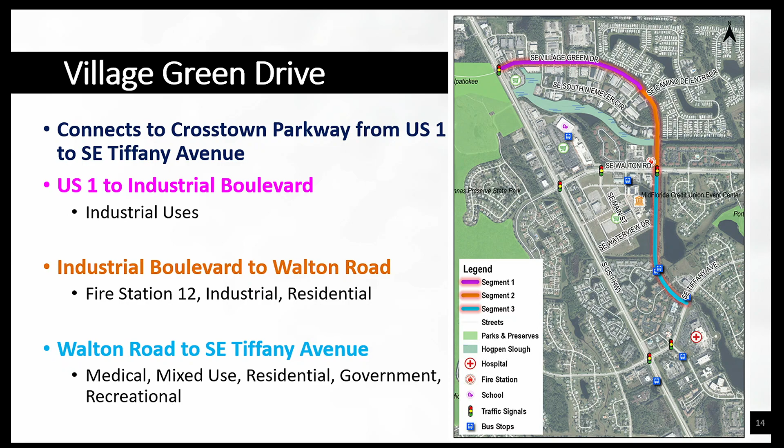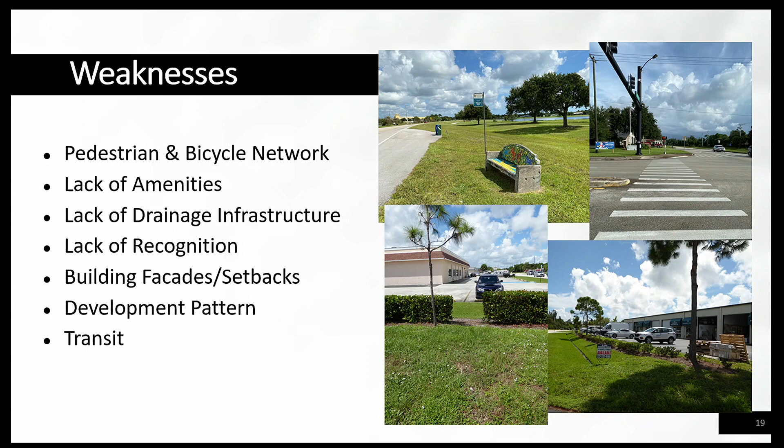Some of the weaknesses along the corridor: we found missing bicycle and pedestrian facilities, the development pattern, which is very autocentric in nature, building facades and setbacks, and also the existing transit on the corridor.

The posted speed limit here is 30 miles an hour, and we found through our data collection effort that the average speed is about 40. At 40 miles an hour, if a pedestrian were to be struck, there's a 90% chance that they would be killed. And of course, this number and the chance begins to decline as the speed declines.

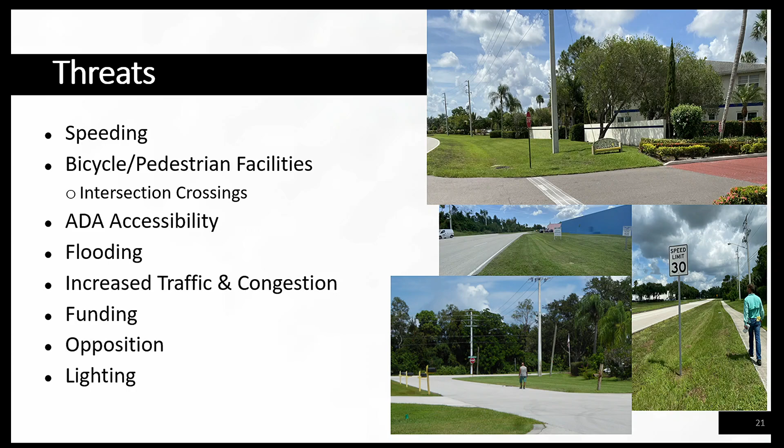Additional threats include ADA access, which are items like curb ramps, crossings, detectable warning pads, push buttons to cross, those type of items. Next slide, please.

So next, we're going to be talking about the existing conditions. Just a reminder, we went into more detail on these items at our first meeting. So this table illustrates the raw data we collected over a 72-hour period, which is the daily traffic along Village Green Drive and the speed.

The first 3 rows are between US 1 and Walton Road, and the last 2 rows fall between Walton Road and Southeast Tiffany Avenue. As you can see, the first 2 segments have 3 times more traffic than that last segment south of Walton Road.

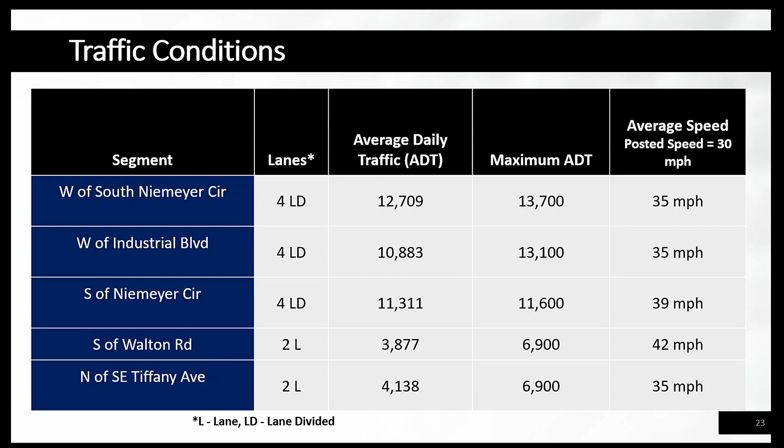As I mentioned previously, the posted speed limit is 30 miles an hour, and you can see the average speeds were from 35 to 42 miles an hour. Again, this is an average, which means that vehicles were traveling above those speeds.

So as I previously mentioned, the roadway was separated into 3 distinct segments due to the roadway configuration and the available right-of-way. So we're going to quickly go over those 3 segments.

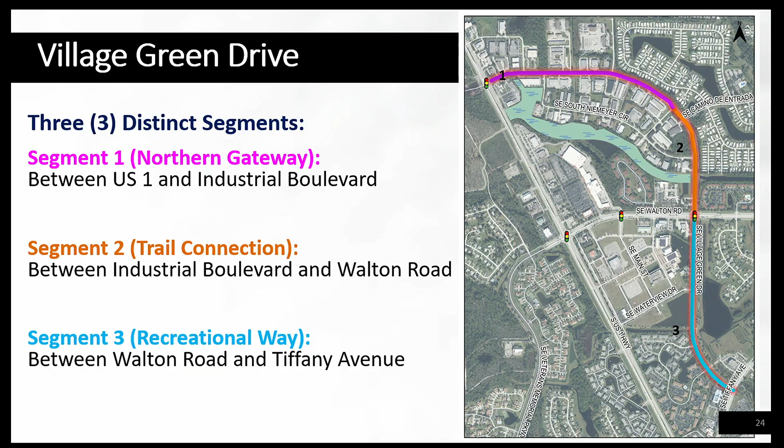Next slide, please. The first segment is what we've dubbed the Northern Gateway, and it connects the Crosstown Parkway. This is the segment which receives the most traffic. Here, the right-of-way is approximately 100 feet in width. Buildings are set back. You have primarily industrial uses.

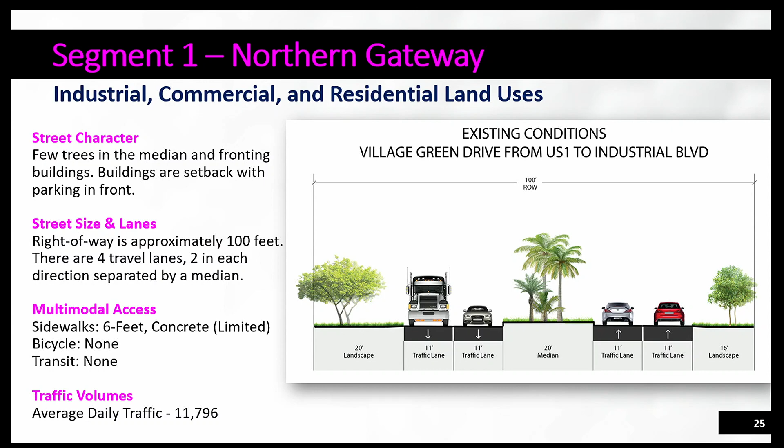There's no pedestrian access from the buildings to the roadways. There's 4 lanes of travel separated by a 20-foot median with 16 to 20 feet of landscaping on both sides. There's no transit, bicycle facilities, and no sidewalks with the exception of a small sidewalk near US 1. Landscaping along this section is limited.

Next slide, please. The second segment, which we've dubbed the trail connection, is where the right-of-way opens up to about 150 feet. The buildings here are also set back with parking in the front.

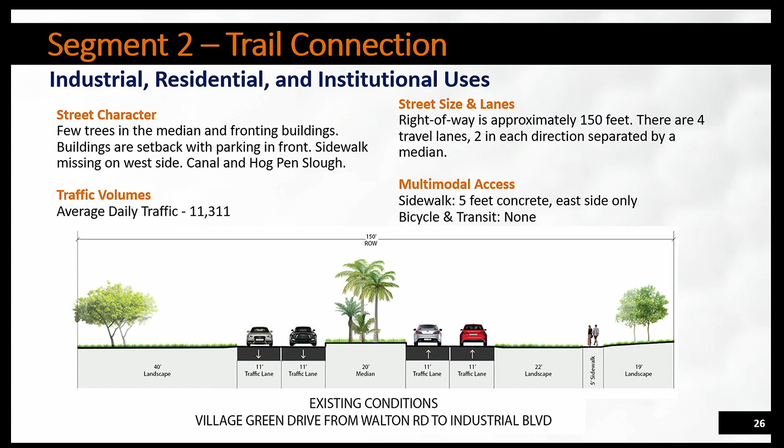Same roadway configuration as the previous segment, but there is about 40 feet of landscaping available on both sides. This segment also includes the entrance to the Spanish Lakes Golf Village community, and there's a canal which connects to the Hog Pen Slough, which we'll discuss later. Again, there's no bicycle or transit facilities, and there's no sidewalks along most of this segment with the exception of a 5-foot concrete sidewalk on the east side, connecting the Spanish Lakes community down to Walton Road.

The third segment, which we've dubbed Recreational Way, falls between Walton Road and Tiffany Avenue. It's a little bit different in character as well as traffic volume than the first two segments. Here's where the travel lanes go from 4 to 2. There's no buildings fronting this roadway. You can access City Center from this segment.

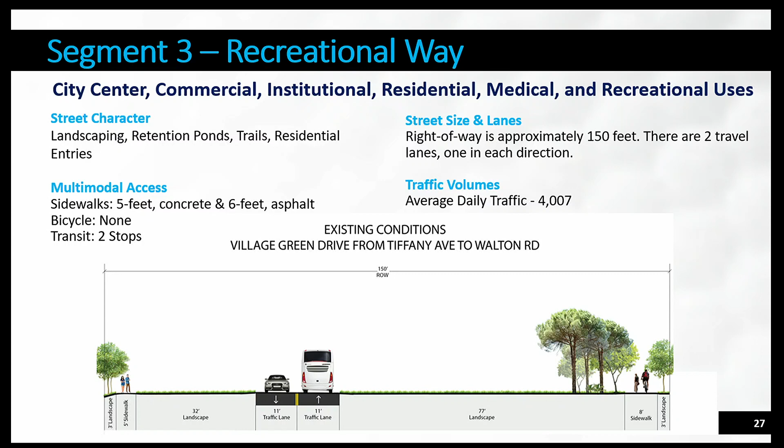The right-of-way here is still consistent with the second segment, being at 150 feet. There's sidewalks on both sides of the roadway with the exception of a missing link between the entrance of the Midpoint condominium community and Tiffany on the west side. Traffic here is significantly less, and you have the Wood Stork Trail on the east side. There's lots of opportunities here for recreational enhancements along this segment.

So we're going to jump into our conceptual designs. We have 2 concepts to present to you tonight. This is going to be for the first segment, which is US 1 to Industrial Boulevard.

The first concept, shown on top, includes a 10-foot shared use path and a 10-foot sidewalk, which can also be used as a shared use path. Essentially you have two wide sidewalks in that first concept. The second concept includes two 6-foot sidewalks on each side, a 5-foot separated bicycle lane, separated by a 3-foot concrete barrier.

Melissa, poll question please. Poll question number 4: select the design concept you prefer for segment 1, US 1 to Industrial Boulevard. Concept 1 is the 10-foot shared use pathway at the top with the 10-foot sidewalk. Concept 2 is the 6-foot sidewalks, the 3-foot concrete buffer, and the 5-foot separated bike lanes. You can go ahead and make your choice.

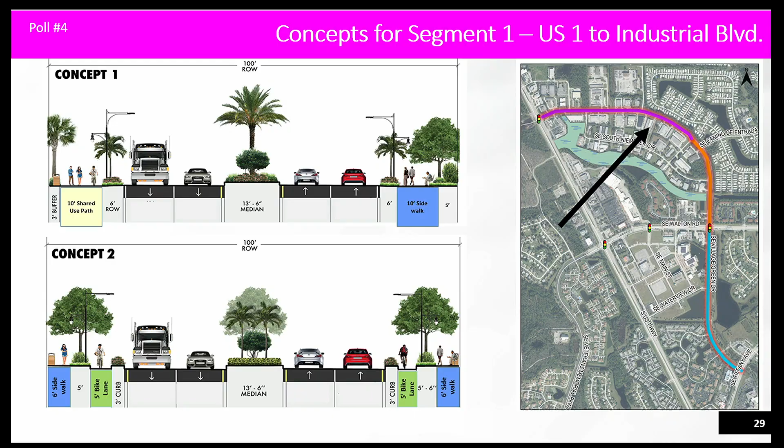All right, moving on to the second segment, which is Industrial Boulevard to Walton Road, and this is where the right-of-way opens up. The first concept includes the shared use path here at 12 feet and a 10-foot sidewalk on the opposite side. Then you have concept 2 at the bottom, which includes two 10-foot sidewalks, a 5-foot separated bike lane, separated with, again, a 3-foot concrete barrier.

Melissa, for your 5th poll: select the design concept you prefer for segment 2, Industrial Boulevard to Walton Road. Concept number 1, a 12-foot shared use pathway and a 10-foot sidewalk. Concept 2, two 10-foot sidewalks, a 3-foot concrete buffer, and a 5-foot separated bike lane. You can go ahead and make your selection.

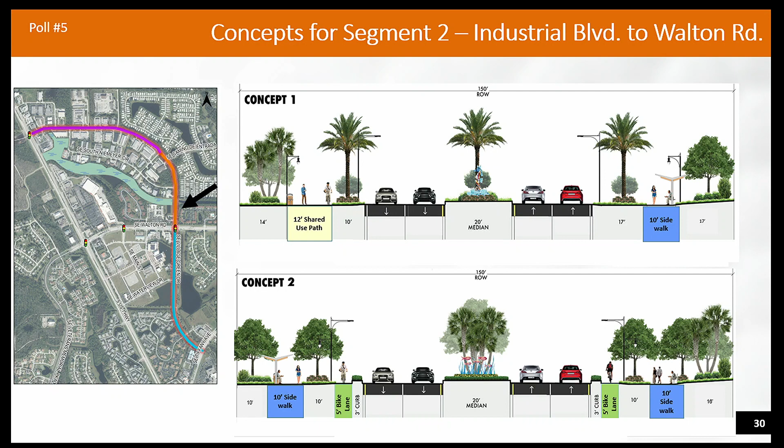We'll go ahead and close that one out right now. Same as last time, 53% concept 2 and 47% concept 1. So pretty much right down the middle. All right, wow, got a tough audience here.

This is our next segment, which is Walton Road down to Tiffany Avenue. Concept 1 includes widening the Wood Stork Trail to 12 feet to become a shared use pathway, a 10-foot sidewalk on the opposite side, and we're proposing a 20-foot center island median to match the first 2 segments. Concept 2 includes relocating the Wood Stork Trail closer to the roadway, 2 5-foot separated bicycle lanes separated by a 3-foot concrete barrier, a 14-foot median, and a 10-foot sidewalk.

Melissa, select the design concept you prefer for segment 3, Walton Road to Tiffany Avenue. Concept 1: 10-foot sidewalk, proposed 20-foot center island median, 12-foot shared use pathway for Wood Stork Trail. Concept 2: 10-foot sidewalk, proposed 14-foot center island median, parallel parking, 3-foot concrete buffer, 5-foot separated bike lane, and 10-foot shared use pathway for the Wood Stork Trail. You can go ahead and make your selection.

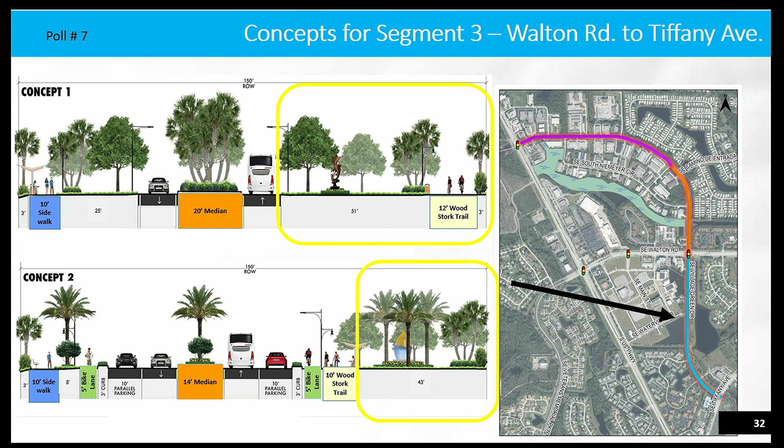Great, we're getting some great feedback here. Next I'm going to be presenting some intersection concepts. So here we have two options for Village Green Drive and Camino de Entrada, which is the entrance to the Spanish Lakes Golf Village community.

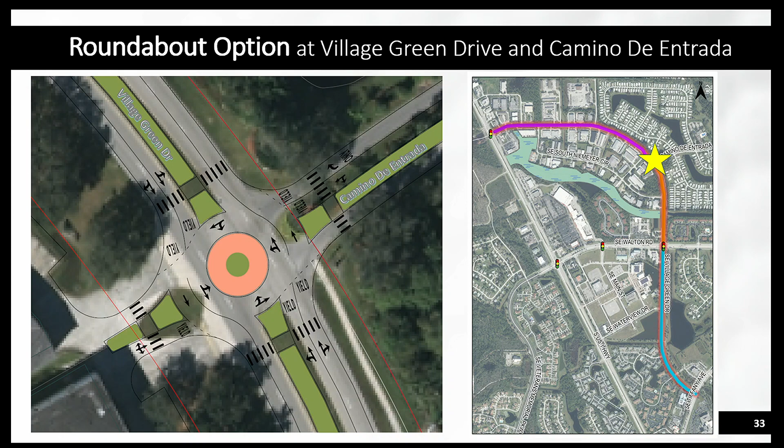Here you see a roundabout option. Roundabouts are a traffic calming technique which slows vehicles down to 15 to 25 miles an hour. It reduces the severity of intersection collisions, improves traffic operations, and makes it safer for vehicles, pedestrians, and bicyclists when designed correctly. We found that a roundabout would fit at this location, and further analysis would be needed if you all vote for this concept.

Next slide. This is the second option at Village Green Drive and Camino de Entrada, which would include enhancements to the intersection, pedestrian crossings with signage, reducing the turn radii, or what we call extended bulb outs, which slows vehicles down when turning, and of course ADA improvements. We're also showing two lanes coming out of the community for right and left turning. We believe this would improve traffic conditions until there's enough traffic to warrant a signal.

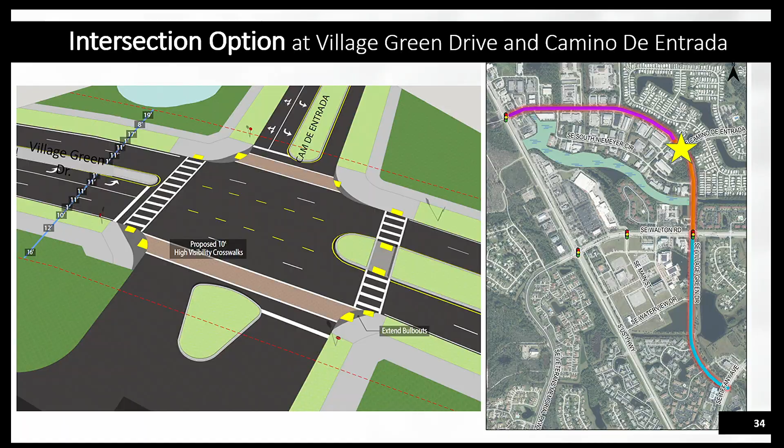Next slide. Here are your two options side by side. Melissa, can you read us polling question number 8, please? Select your preferred intersection improvement at Village Green Drive and Camino de Entrada, a roundabout or intersection.

We can close that poll out. Well, it's 50-50 even, roundabout or intersection.

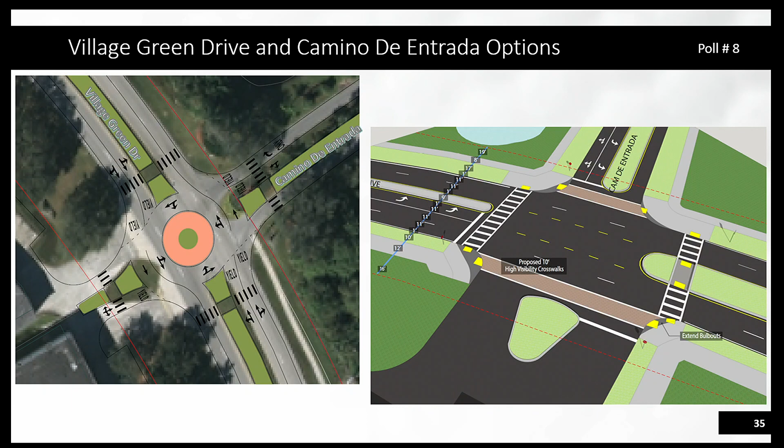So for Walton Road, we'd be looking at intersection improvements, as you see here, which improve crossings. Though we're showing a standard crosswalk, you can apply any type of design or stamped asphalt, and I'll show you another picture in a minute of an artistic style of crosswalk. We're also showing extended bulb outs here, reducing that turning radius, slowing vehicles down when turning, and also shortening the crossing length for pedestrians when they do cross.

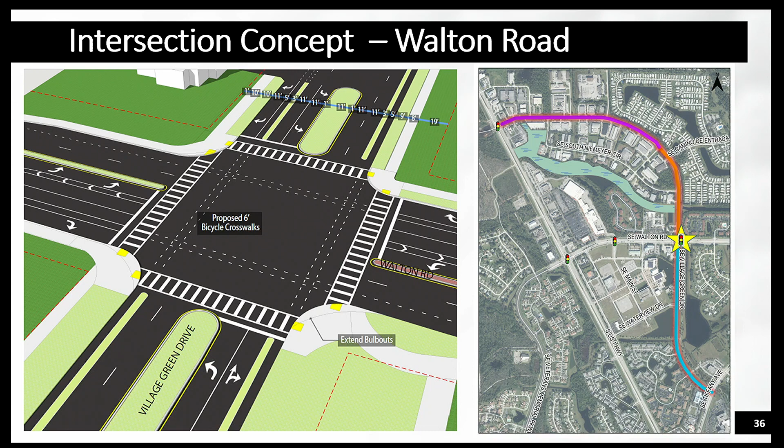Something else we would recommend is for the city to work with the county on traffic signalization, and improvements for not only vehicles but for pedestrians, and maybe looking at putting in a bicycle signal here.

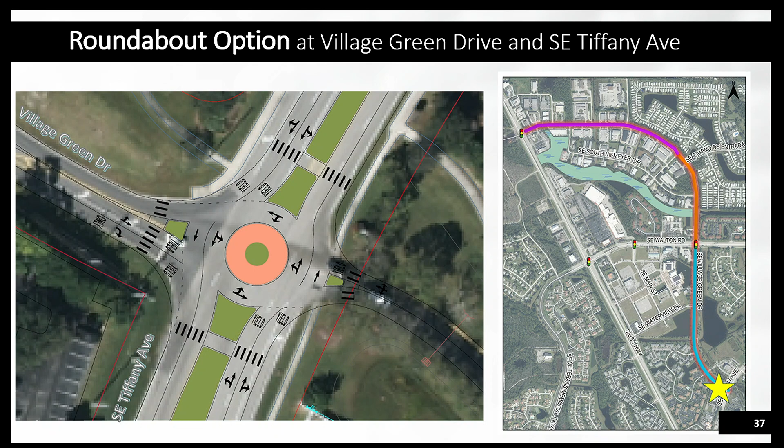Next slide. All right, so we've got two options for you at Village Green Drive and Southeast Tiffany Avenue. This is our roundabout option. Again, we found that a roundabout would fit at this location, but further analysis would be conducted should you all vote for this option.

Next slide. And then here is our intersection improvement option. Again, here we're showing enhanced crosswalks with pedestrian signage, and here we've got a funky artistic design for crosswalks. Again, reducing that turning radius with an extended bulb out, and also bringing a better alignment of the driveway to the medical center.

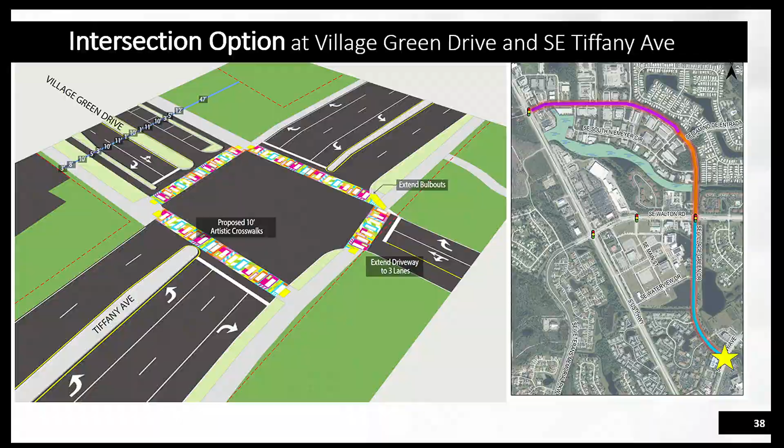Next slide. So here are the two options side by side. Melissa, can you go ahead and read us polling question number 9? Select your preferred intersection improvement at Village Green Drive and Southeast Tiffany Avenue, roundabout or intersection.

We can close out poll number 9. So by a couple of votes, roundabout over intersection. All right, so that's a little bit more definitive.

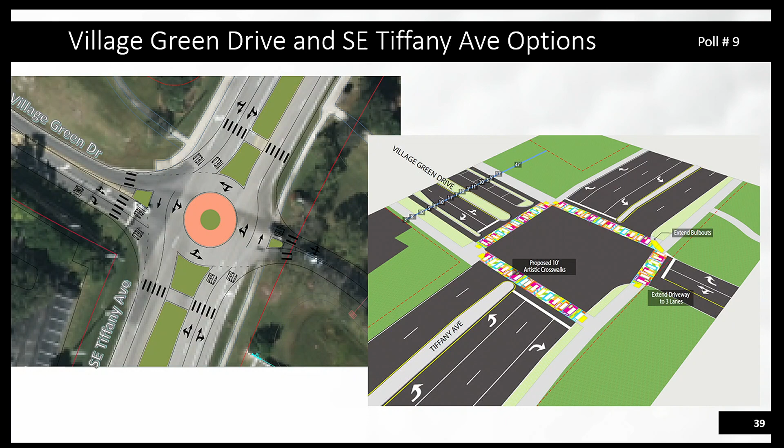Dan? Well, good evening everyone. Thank you, Christina. My name is Dan Sorrow with the land planning and landscape architecture firm Cotleur & Hearing, working for and with Marlin Engineering and Firefly on this project.

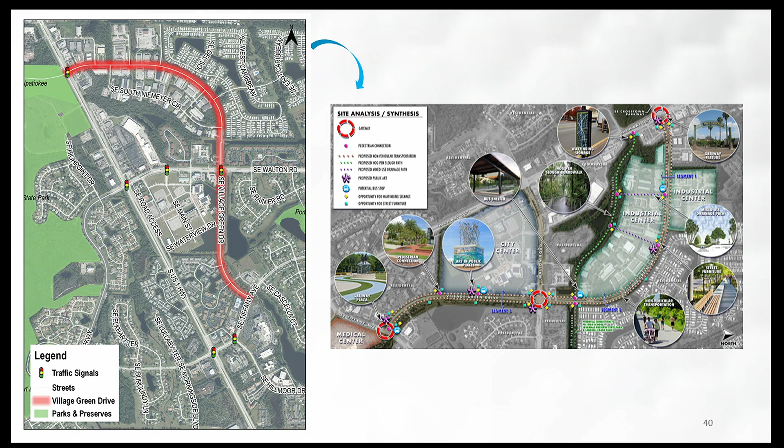This slide shows our site analysis, our site synthesis of the entire corridor. When you begin to talk about placemaking and branding, creating a sense of place, it's really important to look at all the elements that make a place special. If you think of memorable streets and corridors you've been on, you probably recognize a certain art piece or a certain feature of a bus shelter design, or some kind of wayfinding or gateway feature that stood out to you.

What we've tried to do is look at different opportunities along this corridor where we could begin to implement some of those elements and create what we feel would be a meaningful corridor for all the users along Village Green Drive.

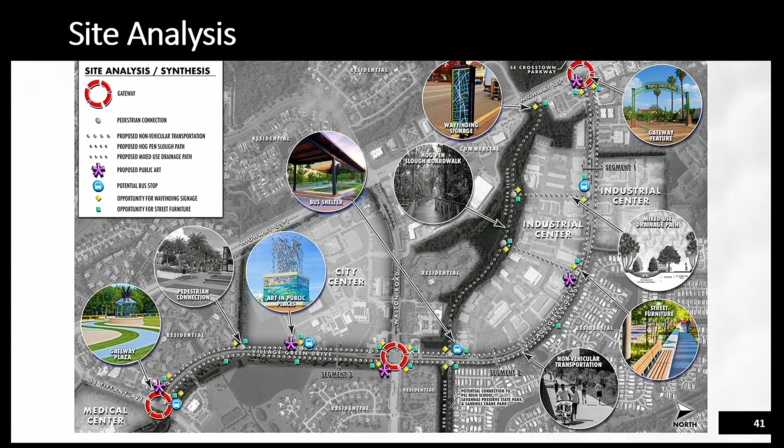So on the highlighted circles, you can see certain nodes and certain locations where we are suggesting some of these improvements could be located, and they range from public art to street furniture and plaza improvements and general corridor use. This first slide, showing the colored circles, indicates different features that we are presenting as possible options for the corridor.

The plaza designs and the different artwork that already exists just west on Crosstown Parkway, such as the Guy Harvey column piece on top of the bridge with the artwork and the sculpture, and the Crosstown Plaza Parkway design with the giant snook and pineapple sculptures, are already elements that could be continued onto Village Green Drive and begin to create a memorable experience. We're trying to provide options for the community to consider. There's not one option being proposed tonight, but just to generate what some of the different design concepts are for gateways and plazas.

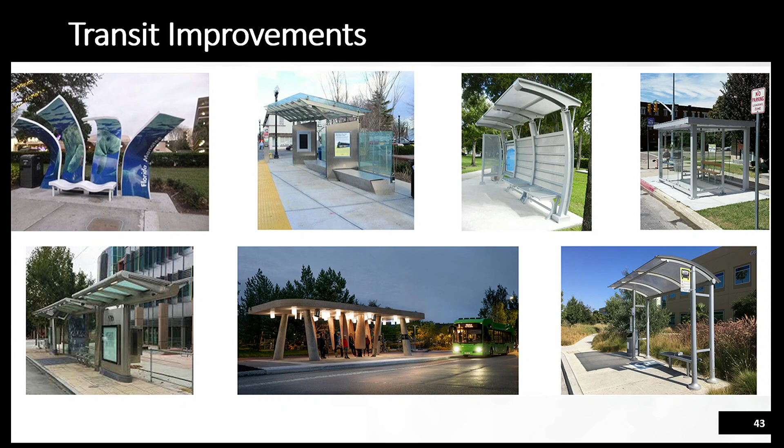When you look at different transit components, such as bus shelters and architectural pieces that can be used along the corridor, we've come up with a couple different scenarios. On the top left, it tries to incorporate some public art into a kind of funky bus shelter design with the wavy bench and the picture of the manatee located on the backside of the shelter. You can also have very contemporary and modern transitional type architecture, as you see in the steel and glass structures, and even some built concrete structures at the bottom. All of these elements can be used to tie the corridor together and start to become a branding element for the roadway.

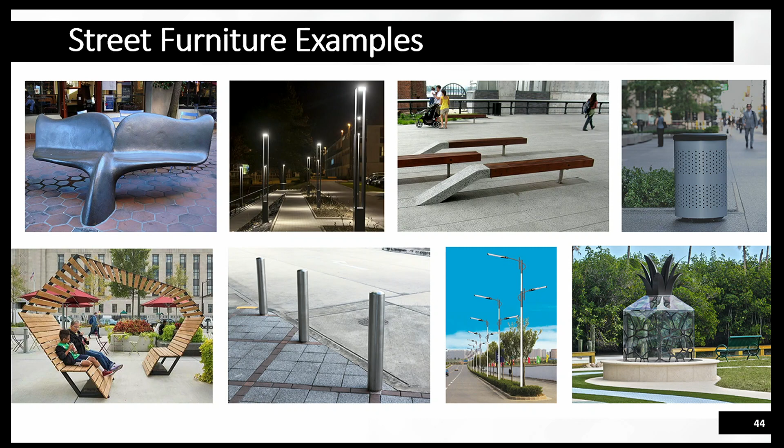Street furniture examples - once a particular theme is chosen, whether it's coastal, Mediterranean, transitional, or contemporary, I think the whole package would want to be similar in nature. This slide shows some street furniture examples. You can get very whimsical with the whale seat, if that were to be a kind of oceanic theme throughout the corridor. On the bottom right, you've got the giant pineapple sculpture in Crosstown Plaza with the seating around it. Those elements could be continued throughout, along with other examples of street lights, trash receptacles, and bollards - all the typical furniture corresponding with one another.

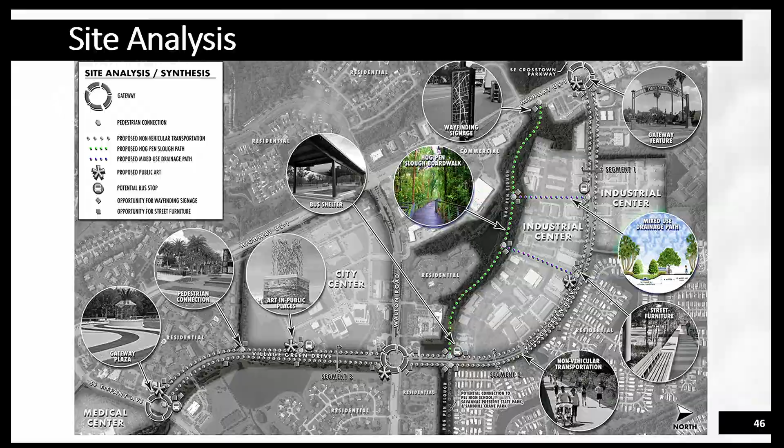This shows a graphic of the Hog Pen Slough treatment area. What it does is provide residents an opportunity to experience the Hog Pen Slough, get them out on the water, get them into nature, and really show how the different drainage systems in your city can be used to help filter the nutrients and pollutants that run off from stormwater onto the roads.

This area can be enhanced once those invasive exotics are removed. It can be utilized to reestablish native plant communities, which help with stormwater runoff and provide an element that really is missing today. So you've got the pedestrian corridor throughout Village Green Drive that could connect to a natural experience, kind of away from the corridor but still connected. This could even tie into future connections over in the Savannas and the Woodstock Trail. This element could be included.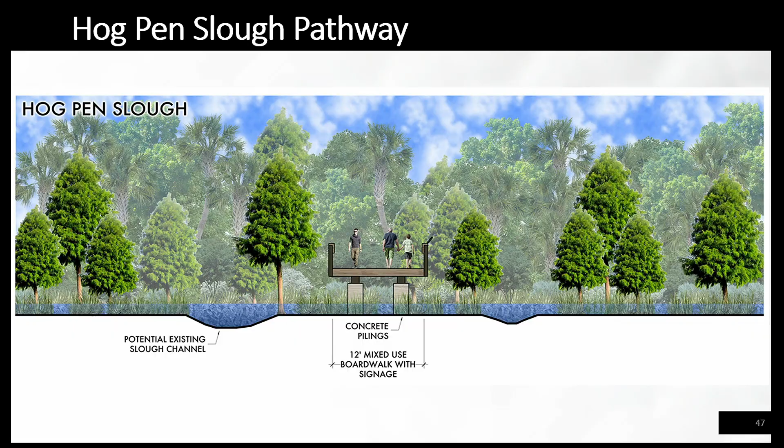So the next polling question - well, I'm sorry, Melissa, let me just preface the next polling question by first saying that there are many different opportunities where you could employ a boardwalk system. I'm sure you've been to many of these, but these are elements that we could easily employ here on this project, and they could serve the purpose for both multimodal users - bicyclists, Americans with disabilities, and pedestrians - that could use this facility.

The polling question is, do you support an elevated multi-use boardwalk through Hog Pen Slough? Yes or no?

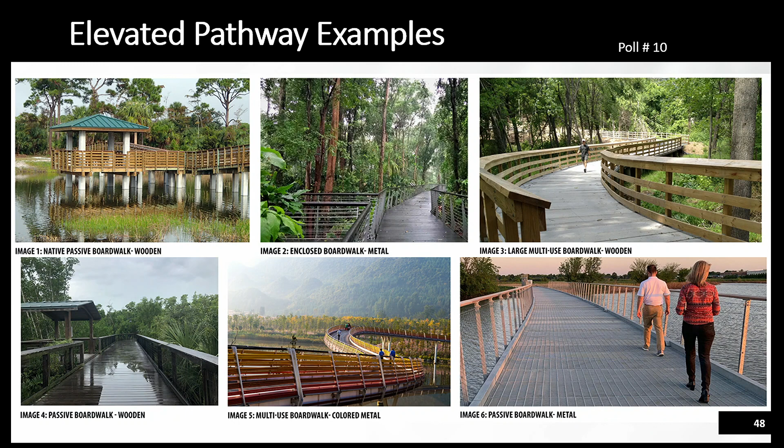We can close poll number 10. 88% said yes, with 13% no. Great.

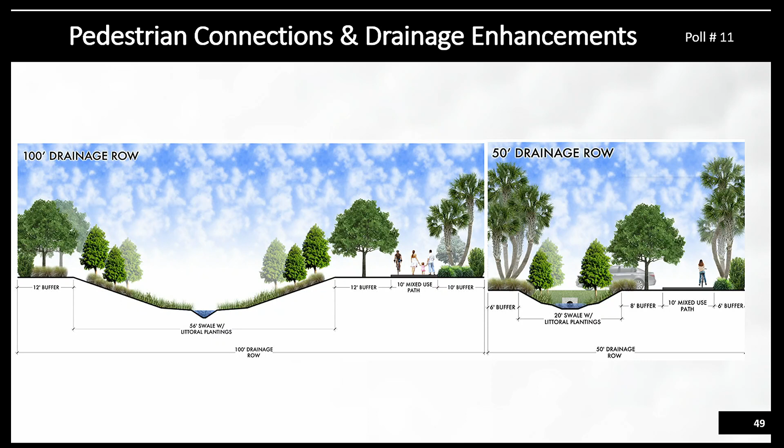All right, thank you, Melissa, and thank you, Dan. So next, I'm going to briefly discuss the next steps.

After tonight's meeting, we'll start discussions with the county, the TPO, and other project partners to start reviewing the preferred concepts that were decided on tonight by you all. Once we get everybody's feedback, we would like to make any necessary edits, hone in on a preferred alternative, and do the analysis needed for the roundabouts. We saw that folks preferred a roundabout at Tiffany, so we'll focus our analysis there.

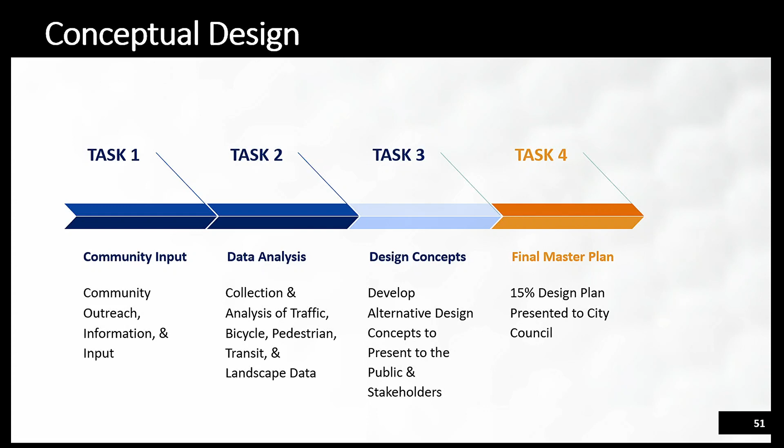And then start finalizing the plan for 15% design and the master plan to present at city council. Next slide. As I mentioned, we are going to be at the March 23rd Citizens Pop-Up event at the Mid-Florida Event Center, where we will be conducting a short presentation of the concepts and have some poster boards available for folks to come in and see the different alternatives and concepts and talk to us.

And then, I'd also like to point out that the project website is City of Port St. Lucie, cityofpsl.org/VillageGreen. I thought I had that on here. I guess not. Next slide.